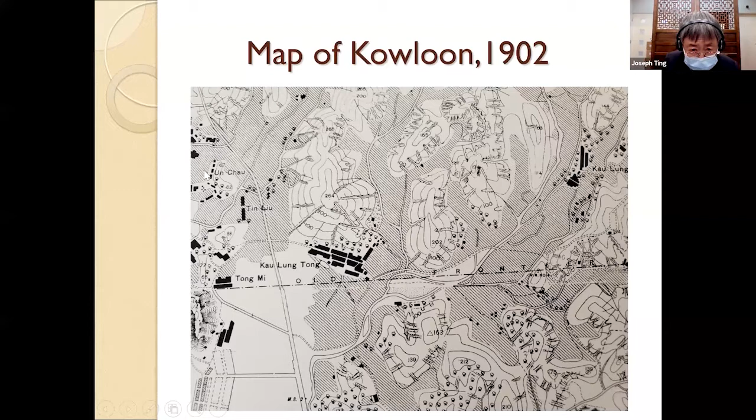And when you look at this map, there's nothing here, apart from that. You can see Un Chau and Tin Liu — these are the original villages in Sham Shui Po. So Un Chau, nowadays we have Un Chau Gai, Un Chau Street, but Un Chau was actually a small village located in this area of Sham Shui Po.

Okay, so I'm going to talk about the Basel Mission in Hong Kong. As you can see, this is Kowloon Tong village — can you see some of the village houses here? This is the Kowloon Tong village. And up on the hill, you see a building — that's the Basel House. The Basel House has for a very long time, perhaps up to this date, been the only visible structure one can see, because the service reservoir at the top of the hill is actually underground, so you cannot see it here. The only visible structure is the Basel House.

Where did they come from? Well, we're talking about the Basel Mission. Basel is a city in the northern part of Switzerland. It's very close to Germany. Actually, the people there speak German.

Two missionaries, Theodor Hamberg and Rudolf Lechler, first arrived in 1847. They were invited by a German Lutheran missionary called Karl Gützlaff. Karl Gützlaff is a very famous person. He was a missionary, but on the other hand he was the interpreter during the negotiation for the Treaty of Nanjing. If you read books published in China, he's always considered to be a spy. So depending on how you look at it, he's a very complicated person. But it was he who invited the Basel Mission to Hong Kong.

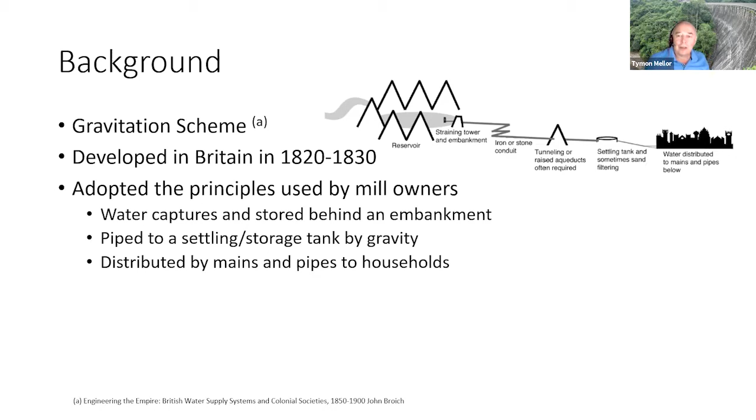To supply water to the growing industrial areas. Prior to that, everyone had relied on wells or just local streams and a very local supply. With the industrialization of England, and they then cascaded this approach out throughout the colonies, they adopted an approach that had been used by the mill owners in the past. That was to basically capture water behind an embankment and then pipe it through to tanks and then distribute by mains to the households. That seems very basic and simple to us now, but it was quite a revolutionary approach, and it became the de facto approach for supplying water.

Now, of course, in Hong Kong, we're not short of water. We get about 2.5 meters nearly of rain a year, so there's no shortage of water. But what we do have is a shortage of supplies. We don't have any rivers or any lakes. So until there was a distribution system, everyone was relying extensively on wells or whatever little streams there were on the hillsides. But none of that water was treated. It wasn't covered, and there was clearly the risk of pollution from both erosion and human activities. So something had to be done, you had to take proactive measures to provide yourself with a safe water supply.

As Dr. Ting has reminded us, the history of taking over or the acquisition of Kowloon, when they took over, they realized that they needed to provide a water supply. There were nearly 13,000 people living there, and there was also an extensive troops living down in Kowloon, and they all needed water. So there was a big discussion on how to do it. A gentleman called Osbert Chadwick, who was the British government's special advisor on sanitary conditions, came up with a scheme, which was to provide a piped water supply to Kowloon.

But this wasn't very popular, strangely. The eminent members of society thought it was basically an approach to just waste money, and we've never heard this approach before. They thought they were just going to waste it on vested interest. But the actual population weren't keen either, because they were concerned that it was just going to lead to an increase in taxation and corruption. And so there was quite a lot of resistance, so getting these proposals through took a bit of doing.

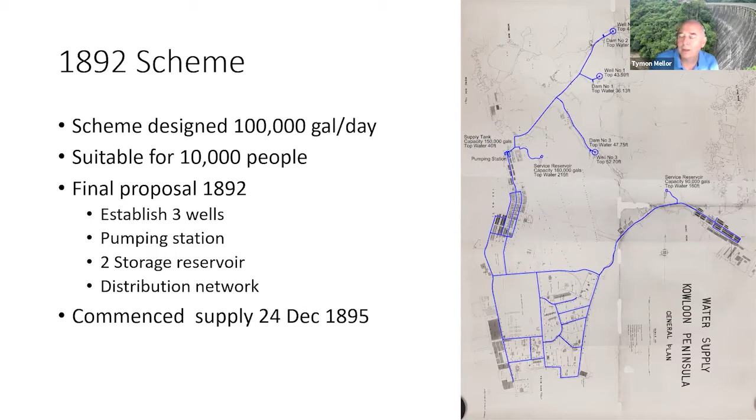But by 1892, a scheme had been developed, which was to utilize 3 wells at the back of Kowloon, and then take that water to a pumping station, then pump that up to a service reservoir, then use gravity feed to supply the pipework around Kowloon. And there was going to be a secondary reservoir over the back of Hung Hom on the hillside there. This scheme was developed and implemented, and they started supplying water in 1895, the day before Christmas in 1895.

These are where the wells are located now. Well number 2 is up here on Argyle Street junction with Princess Street. Well number 1 is off Waterloo Road by the Kowloon Library, and well number 3 is by the junction of Princess Margaret Road and Kings Park. They were then supplied to this service reservoir here on the hill in Kings Park, and the pumping station here in the back of Mongkok. We'll have a look at that in a moment.

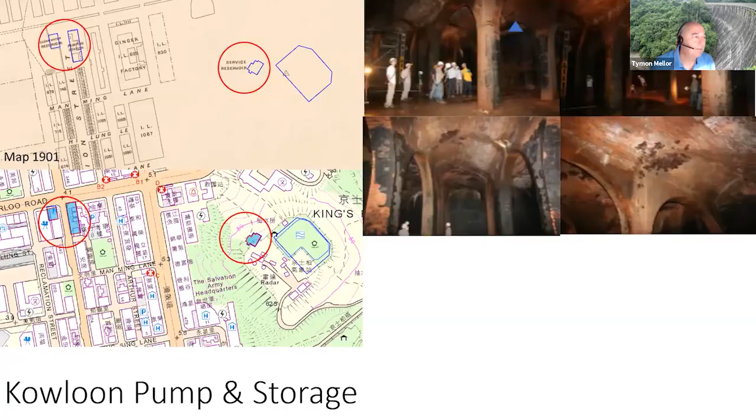This is the service reservoir. It's still in use, and it was recently given protected status. People have been in it, but there's a gas problem there, which is why people generally don't go in it at the moment. They are trying to sort out whether they can provide access to it. And you can see the pumping station here, which is now down on the back of Shanghai Street.

Let's go and have a look at, and then of course, then as I mentioned, there's the reservoir that was put in at Hung Hom. Now, the Hung Hom tank is interesting because it's the only infrastructure we've actually got drawings left for.

There were, however, at the bottom of the hill here, coming to the hillside here, there's a series of tunnels associated with the air raid precaution tunnels, the ARP tunnels, network K5. This was grouted up and demolished as part of the MTR works for the new station. But again, this reservoir was demolished in '62 for the Valley Road estate.

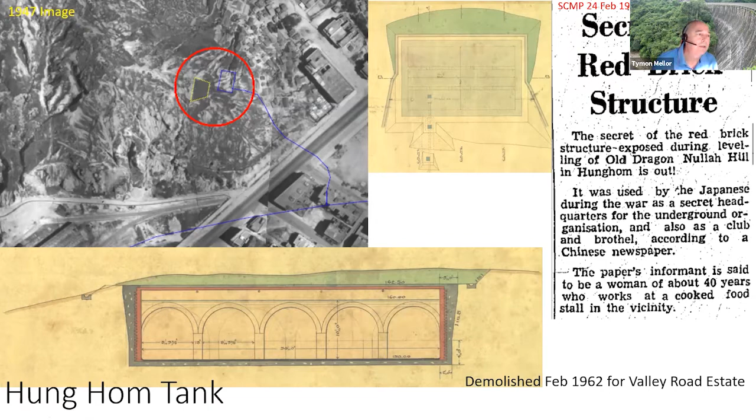The building, once they built the new reservoir in Kowloon, the building was no longer needed and was then converted in about 1910, 1911, to other uses. Part of it became a post office, part of it became stores, and eventually it was used for street sleepers until it was then protected and converted.

So this water supply worked very well. It had its limitations. But the population kept growing in Kowloon. And so within a few years, it became very clear that they couldn't supply enough water for the growing population and they needed a bigger scheme. They tried to enhance the wells. They tried to tap into water supplies from the back of Kowloon, but they had limitations.

However, they were fortunate, as Dr. Ting said, the lease of the New Territories was taken out under the Convention of 1898, which then provided them access to the whole of the hills at the back of Kowloon. And as Mr. Stewart Lockhart noted when he did his tour of the New Territories, he could see that there was an opportunity to build some reservoirs and supply Kowloon with water.

So the next thing they had to do, they had to go and look for possible sources. The first problem they had was they didn't have any maps of the area. They had very limited mapping, but they did get some mapping. They walked around and they identified 5 possible sites.

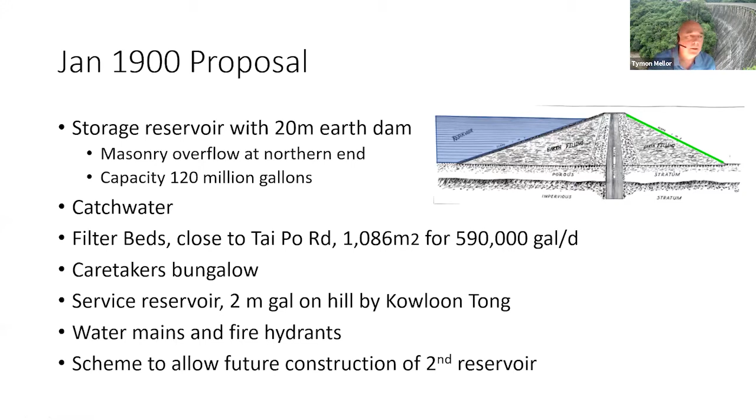The scheme was mulled over, and Chadwick had a look at it, and he provided some ideas and some suggestions. He wanted to build the whole dam out of masonry or concrete. He was very concerned it could get washed away with the intense rainfall. He wanted cut-offs, and he suggested then that they only abandon the wells once they proved the new scheme worked.

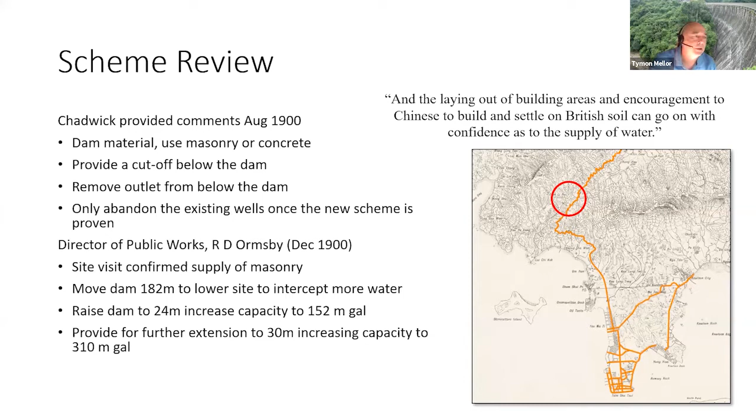Ormsby, who was the director of works, was very concerned there was no rock in the area, and that's why they hadn't wanted to put up a masonry dam. But they did a site inspection and found rock. They also decided to move the dam lower down the river, where there was a narrower cleft, so they could build a higher dam and get a larger volume behind it.

This was the area they were looking at. Here's the old Tai Po road running up here. Their first dam was going to be located at this location, giving them a capacity of 120 million gallons. But on inspection, they realized there was a narrowing of the valley just here, and as you can see, they put a line across where they'd build a dam there instead. With a dam in that position, they could get a 310 million gallon capacity, a much larger facility.

So this was then the scheme. They got some consultants on board, Denison, Ram and Gibbs. Gibbs used to work for the government; he was the man that did the original study, but he had joined this consultancy, and they became quite a big company. They did this job, they also designed the post office, and did some work on Jubilee Road and some public buildings on the island. So they worked up the scheme, but the costs had now increased from 380,000 to 835,000, primarily due to the significant increase in the dam size.

So this was going to be the scheme. We'd have the dam here, which had a catchment area of about 438 acres, but by including a catchwater along the north of the hillsides, that gave them an additional 600 acres. So they were then confident the dam would stay full throughout even the dry winters.

So this was the scheme they ended up with. They had the main dam across the river, and what they call the bywash dam, which is the overflow. They had a little catchwater on this side and the main catchwater running around the north. They had a caretaker's bungalow, and built a pipeline that ran down the valley, across a bridge, through a tunnel to the filter beds. From the filter beds, they would supply water down to the boats, or down along Old Tai Po road into the tunnel, into town.

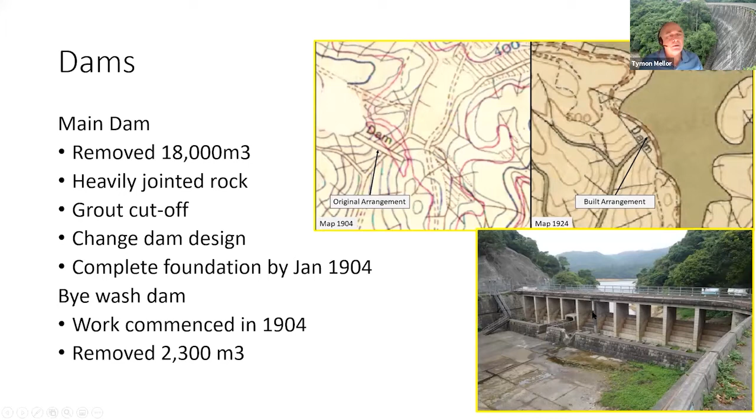Then they started work on the bywash dam, which is this other structure, basically the overflow. So when it rains, if the dam gets too full, it overflows over this bywash dam. This is the dam.

They started building it, got the foundations sorted out, and started coming up, but the company building it ran into financial problems, and you can just about see there's a sort of a nominal mark around there. They actually got to that point and had to stop because the company had no more money left. But they got high enough up that they could start impounding, collecting the water. So by December 1906, 11 years after the original scheme was commenced, they could start supplying water to Kowloon.

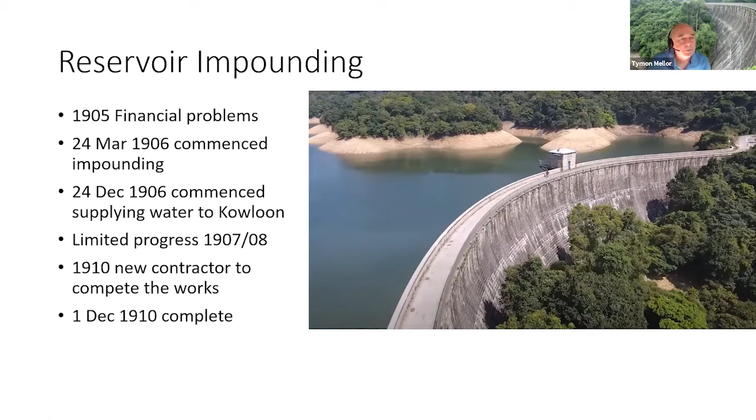However, there was limited progress over the next few years, and then in 1910 they got a new contractor on board, who completed the structure by the end of 1910. So when we look at the facilities now, you'll see it's all got 1910 on it, but it was actually completed much earlier. The final structure held 374 million gallons.

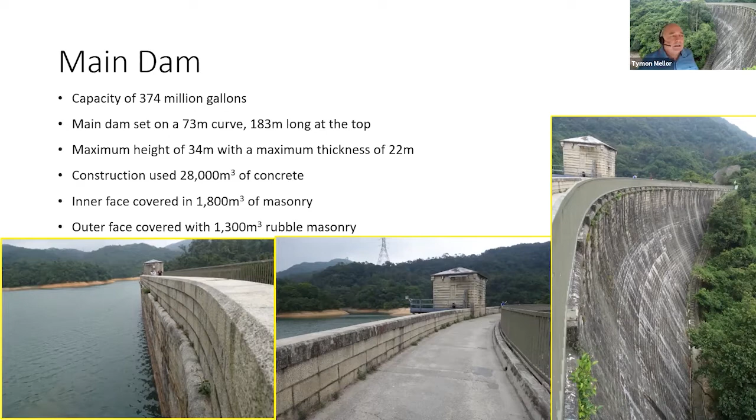This dam is 183 meters long, 34 meters high, so it's quite a high dam, and about 22 meters thick at the bottom - an impressive piece of work for the time. The bywash structure is 43 meters long, 7 meters high. As I say, this originally had some sluice gates in it, so they could vary the height of the water and let water down.

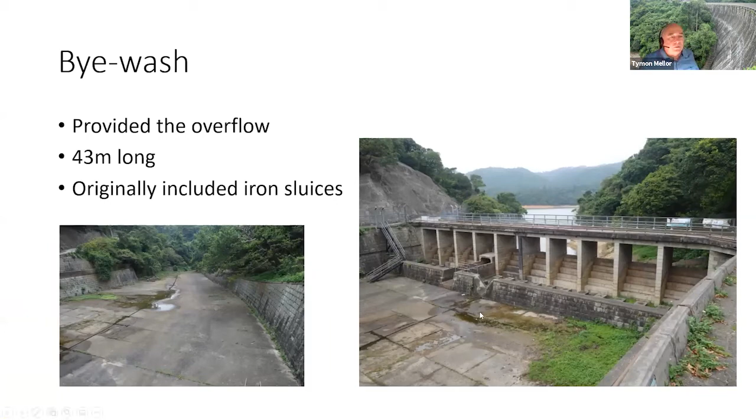The original structure has since been changed with an infill of stone and concrete. There are a number of structures built for this: we've got the valve house, where you extract the water, which has 1910 on it, and the recorder houses that monitor the water levels and record them.

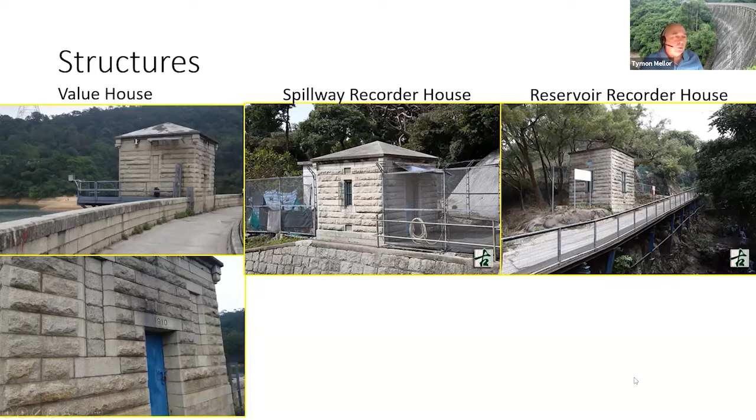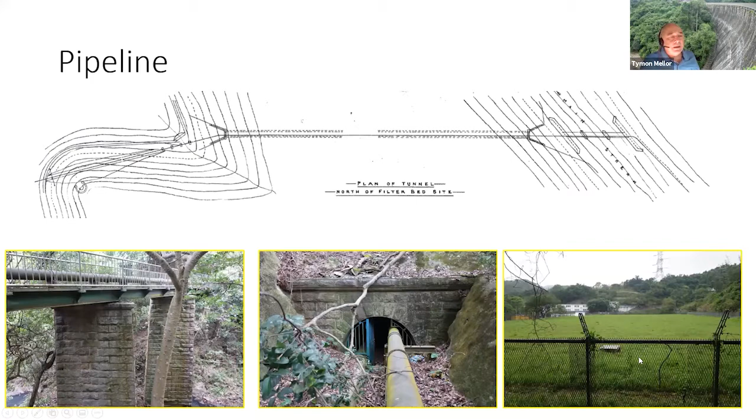As I mentioned, there's a pipeline from the dam. This is the bridge, which comes across down the valley. It then goes through a tunnel into where the filter beds would have been. Now there's an underground storage tank here in the filter beds.

The filter beds were built in construction stages. Initially they built the first three, then added one in 1916, then a couple more later on. It's a very simple approach - just a concrete tank, in this case a lime concrete tank. We have broken stone at the bottom, sand on top, and you put the water in at the top, where it filters down through the sand and comes out fresh.

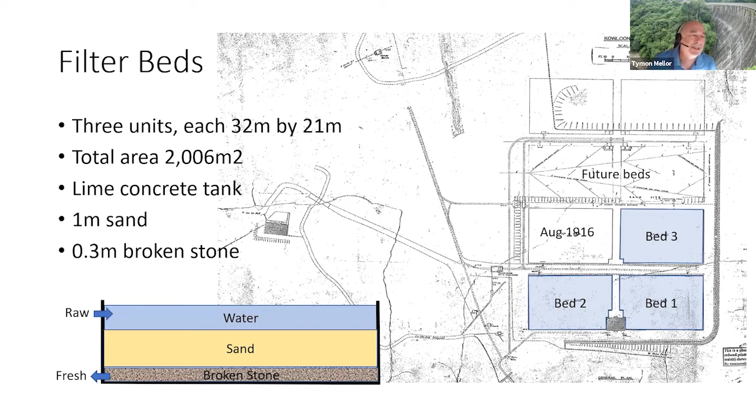The sand would have microbes on it, which would eat the bad things, and the sand would also filter out all the mud and floating materials - the particulates in the water.

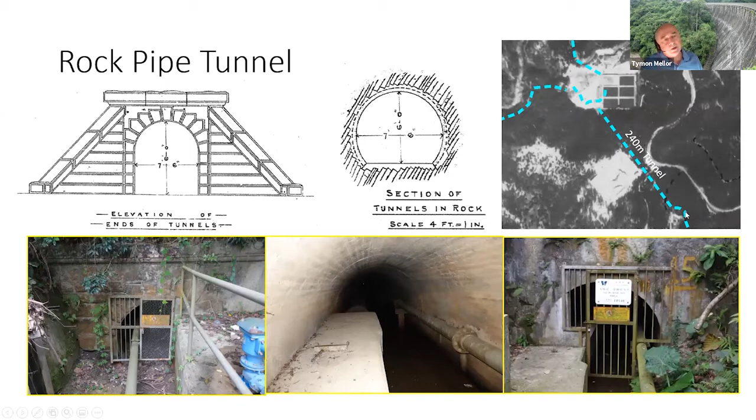From the filter bed, they had a tunnel through a rock tunnel going through the hillside. Here's the filter bed, running through the tunnel, 240 meters, to bring the pipe out onto the side of the old Tai Po Road, and from there it came down the valley into Kowloon.

As I mentioned, the catchwater - there were two initial catchwaters, a 3.2 kilometer one on the back of Beacon Hill. Here's the Beacon Hill tunnel, and here's the KCR tunnel. So the initial one went along there 3.2 kilometers, and there was a little one coming off the side here.

But following a number of dry summers or dry winters, they extended this catchwater another 3.3 kilometers along, to pick up more rivers coming off the hillside there. And this is now a very nice walk and exercise area for people.

As I mentioned, they built a bungalow for the caretaker. We did have some discussion earlier on about this bungalow - the main part is from the original construction, but WSD did put a new roof on it, a metal one, and changed the metalwork here. They've tried to let it, but because of the monkeys in the area, no one's interested in living in a monkey-infested location, unfortunately.

In terms of the supply network, from the filter beds there was a supply line down to the Lai Chi Kok filter beds, which provided water to the boats, and then there was the main coming into town. They needed a new reservoir to provide the gravity feed, because the pressure head from the reservoir up here would be too big. So what you do is feed a tank on the hill, which then locally feeds into the distribution system. This is the hill here, Bishop's Hill or Mission Hill, as we've been talking about.

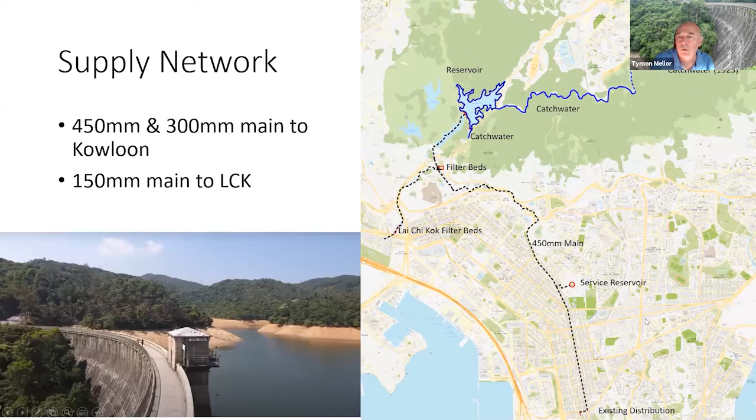The pipe went down to Lai Chi Kok, to filter beds there. They initially built some filter beds - there'd been an outbreak of cholera, so they were very concerned. So they built some local filter beds and a little storage facility, but they undersized it.

As soon as it was opened, in March 1905, it was very unsatisfactory - they couldn't get the capacity through, so they had to double the size of everything. By June that year it was working satisfactorily, supplying water to all the boats, and there were a couple of private companies that would fill up here and take the water out to the ships parked in the harbour.

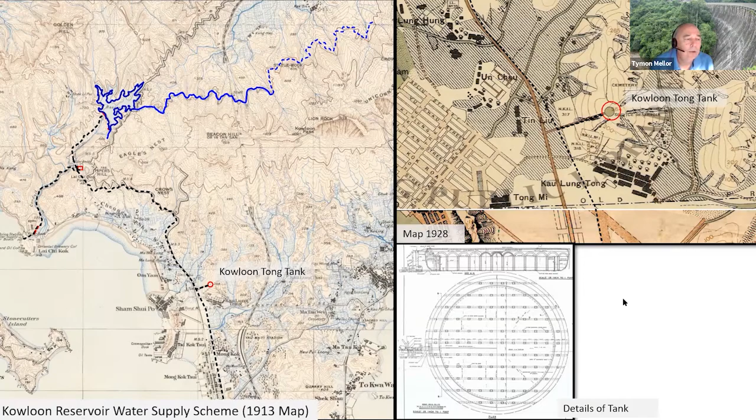So here's the Kowloon Tong Tank, also called the Mission or Bishop's Hill Tank. It's the same map we have from 1928. So the water came down. The actual tank was a relatively straightforward structure - they just excavated the ground, put a concrete slab down, and then built up the external walls and the stone pillars that we see.

It was awarded to a Mr. Tung Shing to build in 1903, and planned to complete in June 1904, and they were trying to get it completed early.

They offered him a bonus to complete it early, and unfortunately he didn't. He completed it late, but they still managed to get it on stream and start supplying water.

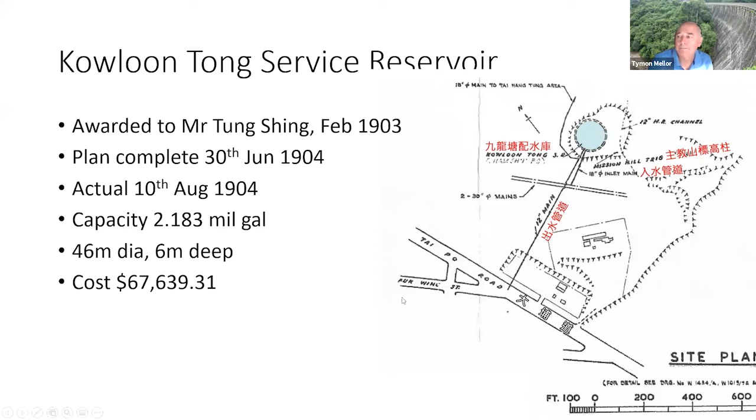In 1952, they did a lot of modification works to the tank. They'd had a lot of leakage on it, so it was going to change. Instead of being a storage tank, it was going to become a break pressure tank, which wasn't so necessary to have as much capacity as there was previously. So they basically filled in around the outside and put a new internal wall in, did a bit of cleanup work on the tank, and revised the pipe work supporting it.

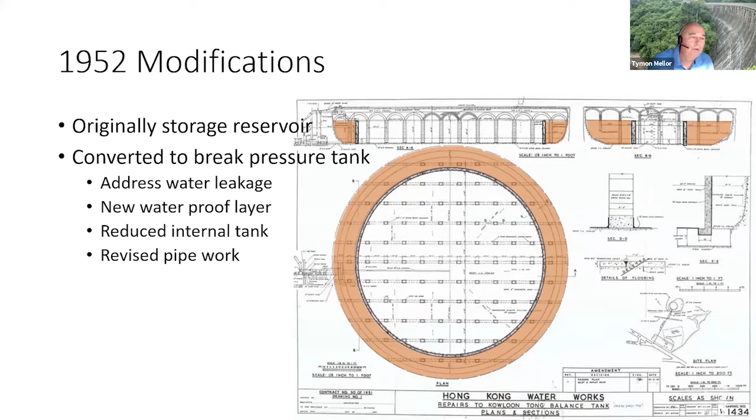I went up there a couple of years ago, and of course it's quite a community facility. People enjoying the area and the quietness and a bit of an exercise area. But of course, that didn't last long.

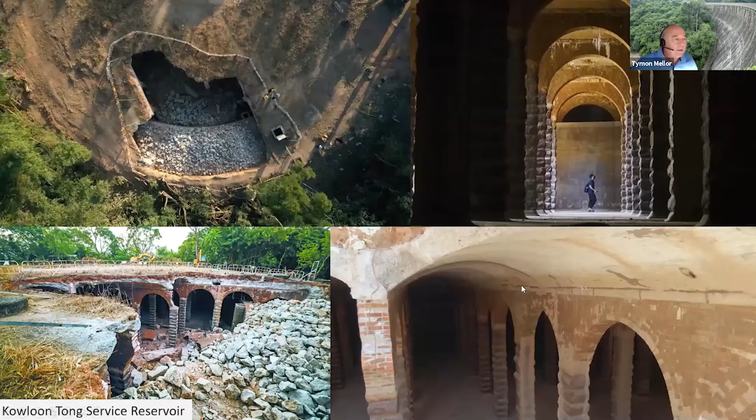As we know, last year, WSD decided the tank was no longer in use. They'd stopped using it, I think it was in '83, '84. It was no longer in use. It was a hassle, so they decided they were going to demolish it. And that's when it became apparent to everybody the importance, or the architectural merit, of this structure.

So, they built the reservoir, they built the tanks, they improved the supply schemes, and everything was working well until 1921, when they could no longer supply sufficient water to Kowloon. Hong Kong Island was also struggling. They had lots of water shortages, getting down to about 3 hours a day with the water. So they then had to have a new plan, and that's when they started building the Shing Mun schemes.

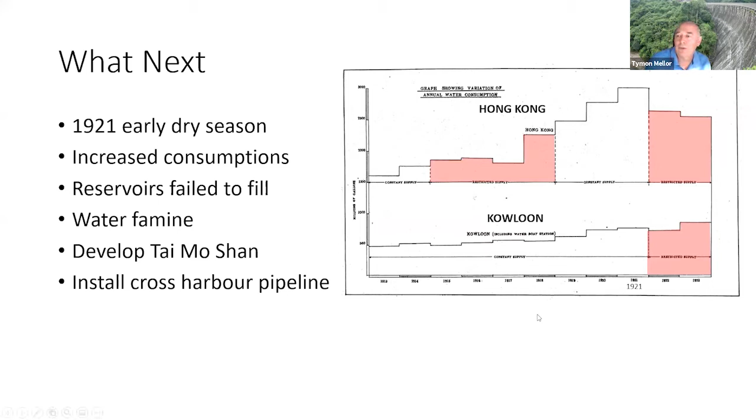But that's not today's topic, so we won't go there.

So in terms of legacy, the water supply to Kowloon allowed Kowloon to grow and provided a safe environment for the development of what was called British Kowloon and Victoria, and the ongoing development of Hong Kong as a significant trading port in the Far East.

Okay, thank you very much, everybody.

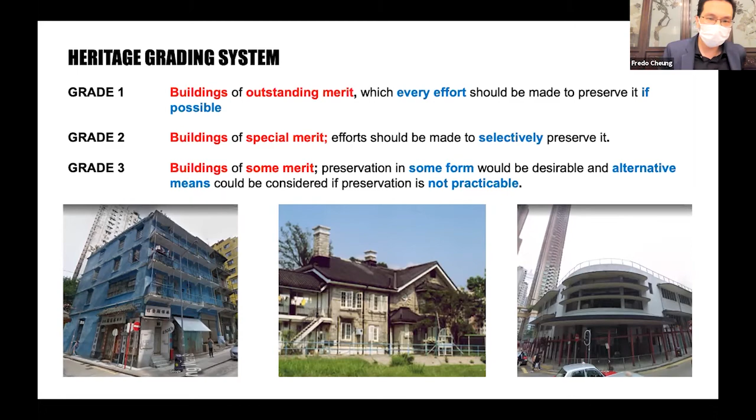So let's take a look at the three pictures below. Think of it in terms of intervention, the level of intervention you can have on these old buildings. On the far left, you have the blue house. In the middle, the old quarters for the waterworks staff at HKU. And on the far right, the old Wan Chai market. These photos were taken sometime in the mid-90s. Pay attention to these photos and see what happens to them over the years.

So you can actually see the level of intervention. With grade 1 and grade 2, you don't actually see a lot of intervention, so the integrity of the fabric is pretty much kept intact. Not many changes. In fact, if you look at the example in the middle, most of the changes actually happened within the building. Whereas with the example on the right, the old Wan Chai market, which is quite unfortunate, you have a building plunked on top of it. So from a heritage conservation perspective, we don't see this as a very good example of conservation.

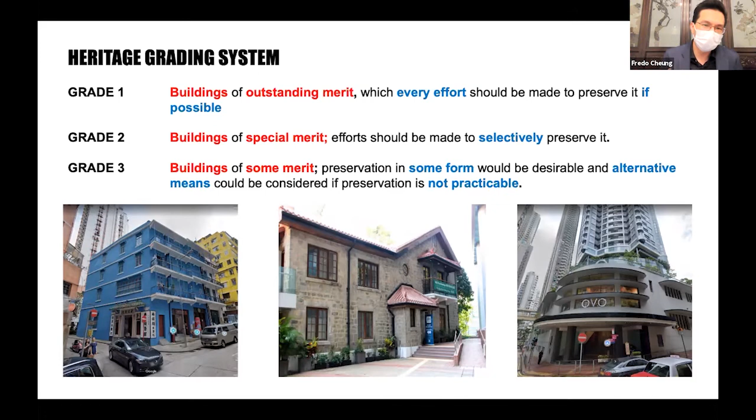In fact, we would call this facadism. So yeah, this gives you an idea of the level of intervention. You can think of it in terms of how much intervention you can actually achieve with each of these. I think this is another way of actually looking at it when it comes to grading.

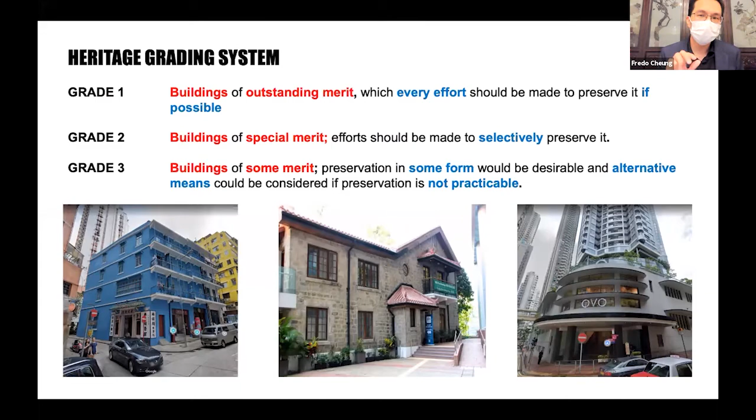This actually brings us to one of the first issues when we talk about the current assessment framework, and also maybe talk about grading. If you look at how our grading system is worded, focus on the word 'buildings.' So it's all about buildings. Whereas if you actually look at other jurisdictions in the world, it's much more diversified—it encompasses archaeological sites, designed landscapes, battlefields, even movable heritage such as transportation like trains and buses. But in Hong Kong, we're still focused on buildings.

So let's put that aside for now and look at the two-tiered heritage grading process. When we talk about how we go about assessing and grading these heritage assets, the AAB is responsible for the assessment, and this is done at the behest of the Antiquities and Monuments Office, AMO. It's through this two-tiered process. In stage one, the AAB members are all given this historic building assessment form, which lists a set of criteria and a scoring system to actually help quantify significance.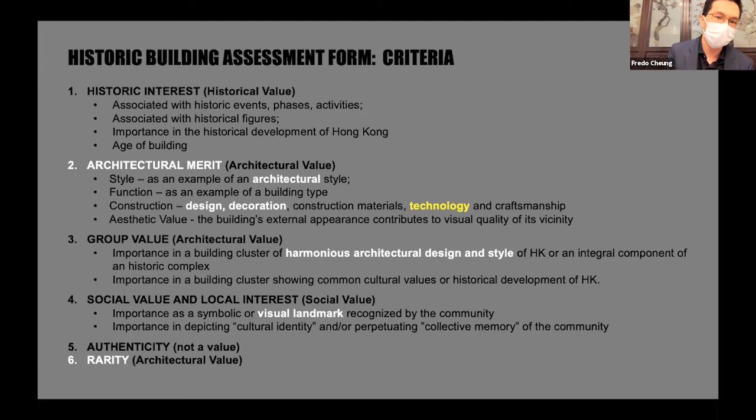So if we look at these 6 criteria, you'll notice that 3 of them already place emphasis on aesthetics and architecture. But as we know, with Bishop Hill service reservoir, it's really a piece of infrastructure, a piece of engineering. Its significance lies not in its architectural design, but in the fact that it is a very significant piece of engineering.

So again, let's take out the sheet. Besides the focus on just buildings, this criteria puts a lot of emphasis on aesthetics and style. And of course, the criterion of group values is also focused on aesthetics as opposed to function, functional relations.

This also explains why, when AMO first announced the 5 historic structures at the Kowloon Reservoir as declared monuments in January 2020, they focused on the tangible. These 5 historic structures were selected primarily because of visual, aesthetic considerations, which in a way explains why Bishop Hill was left out. The service reservoir was left out first because of distance — it's quite far away — and secondly because it's underground, you can't see it.

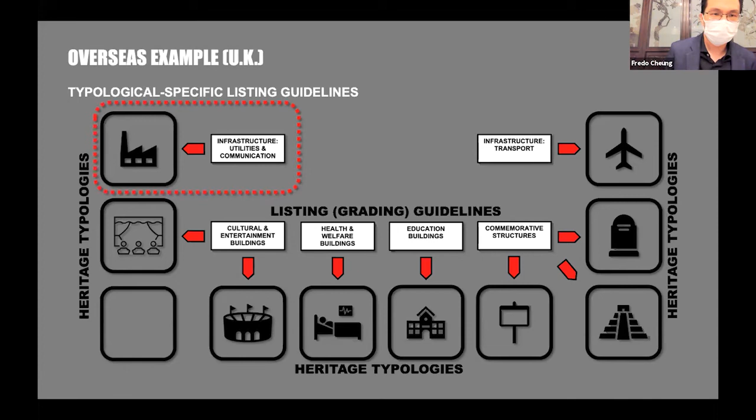Notice one of them is actually infrastructure, utilities, and communication, which is applicable to the scenario we have on our hands, Bishop Hill Service Reservoir. The way they go about doing it in the UK is that they develop 44 sets of selection criteria and listing guidelines, 20 of which relate to building types. And even when we talk about infrastructure, they have 2 different types: utilities and communications, and transport.

They also have something as small as street furniture, which addresses things like historic street signs, or even historic roads and pavements. And there are 18 different types for designed landscapes, one specific one for historic battlefields, and even one for historic ships.

These guidelines are quite important because they provide guidance to people actually doing the assessment. And of course, in Hong Kong, we don't have this kind of guideline to guide the AAB members to go about doing the assessment systematically.

So again, this raises two other issues, our one-size-fits-all approach, and the notion of infrastructure versus architecture building. You can't actually assess waterworks strictly on grounds of architectural aesthetics, but it doesn't quite work because it's a piece of engineering. It was designed by an engineer, Lawrence Gibbs, a member of the Institution of Civil Engineers.

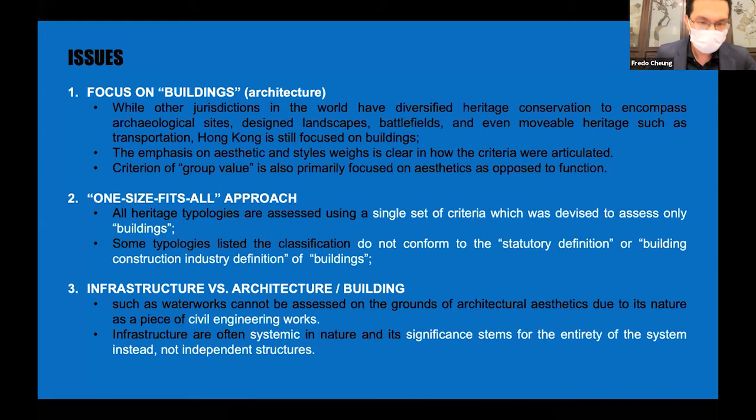More importantly, infrastructures are a completely different animal. They're systemic in nature, not like buildings where you can assess them one by one. When you look at waterworks infrastructure, you have to look at it in terms of a system and understand how it works.

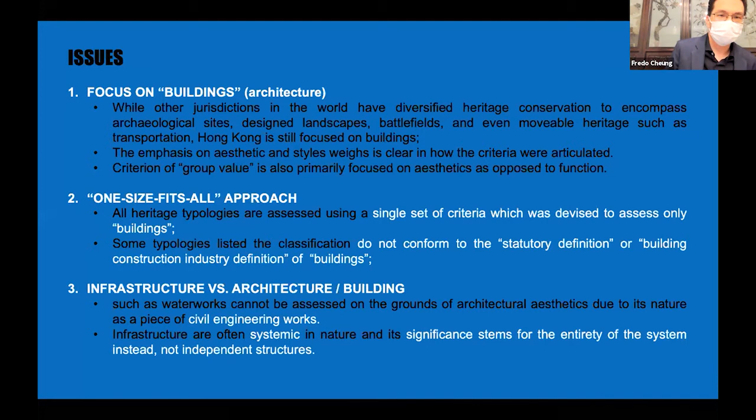So this brings me to a conclusion. In the context of the Bishop Hill incident, there's a general need to adopt a specific set of guidelines for grading infrastructure heritage, which addresses the systemic complexity of infrastructure heritage, and the need to devise guidance on how to approach the assessment of infrastructure heritage in a systematic way.

This is very important because if you don't have a set of guidelines to guide AAB members, there will be problems with consistency. AAB members serve a finite term, and then new members come in to replace them after a certain number of years. How do you ensure consistency between this iteration of AAB members and decisions made by the next iteration? This is why we need a set of guidelines.

In the larger context, this incident reveals that we need to revamp the current assessment framework, to provide typological-specific grading guidelines, and more importantly, to involve heritage conservation practitioners who are well-versed in heritage conservation. So this concludes my presentation.